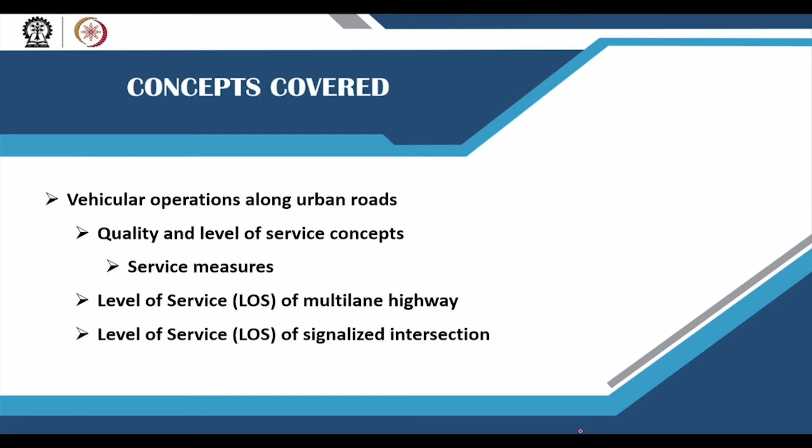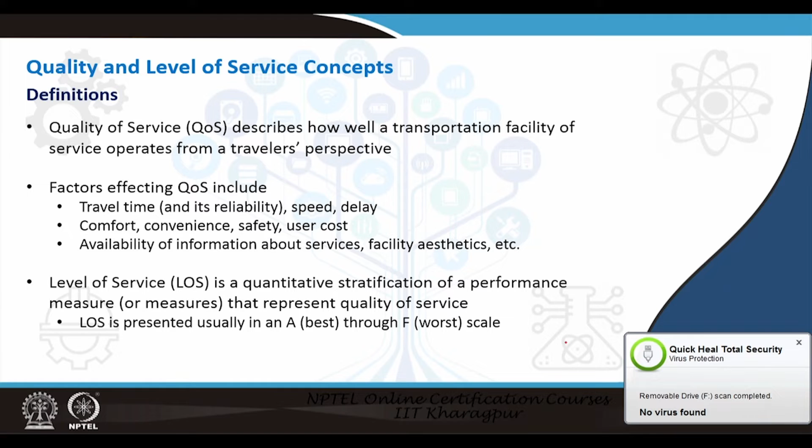When we talk about quality of service, this describes how a transportation facility operates from a traveler's perspective. We have often looked at transportation facilities from the point of view of the operators or service providers, but quality of service allows you to judge a facility or determine how good it is from a traveler's perspective. Factors that affect quality of service include travel time, speed, and delay for the people using the facility. Travel time may also be discussed in relation to its reliability. Comfort and convenience are also becoming more relevant when measuring quality of service.

Also important is the availability of information about services. In the digital era, we all want information beforehand about where a bus or train is, when the next bus is coming, or what the congestion level is at a street where we are going to drive next. All of these affect the quality of service being provided, whether by a bus system, a metro system, or even the highways in an urban area. So that is what is meant by quality of service.

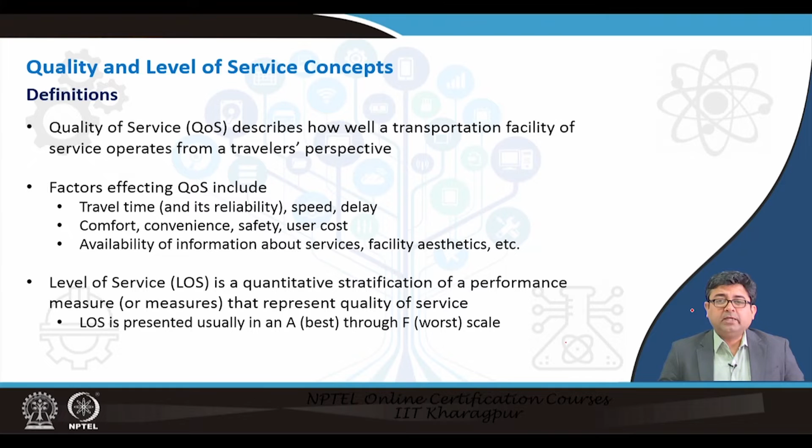Now, since quality of service is a qualitative measure, it is converted into a quantitative measure by something called level of service. What level of service does is stratify the various performance measures into different categories, each representing a quality of service. So level of service is the quantitative stratification of a performance measure or measures that represent quality of service.

So you can convert the qualitative measure into a quantitative measure, and the level of service is often represented or shown on an A through F scale, just like grades in a class or school, A being the best and F being the worst.

Often you will see, in case of highways, different levels of service for different facilities. They all depict that if the level of service is A, then from the point of view of users, that facility is providing the best service possible, whereas if it is F, it is providing the worst service possible. Although this is from the point of view of users, it also takes into account the operators' possibilities. The operators may require a huge amount of money to maintain the service expected by users, but that may not be feasible. So a middle ground is often reached to determine what is level of service A, B, C, D and so on.

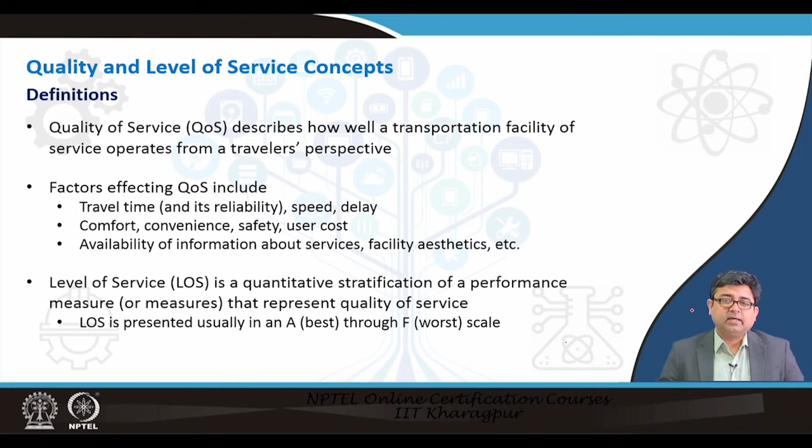So in all of this, in quality of service and level of service, essentially the measure being used is called the service measure. Service measures are performance measures used to define the level of service for transportation system elements.

So what should these service measures have? They should reflect the traveler's perception, but should also be useful to the operating agencies. This is how quality of service or level of service is associated not only with traveler's perception but also with operating agencies. It should be directly measurable in the field, otherwise it is very difficult to quantify if it is purely qualitative or subjective. So it has to be directly measurable in the field and should be estimable given a set of known parameters—if you know something, you should be able to estimate these service measures. We will explain all this in terms of a few examples in this lecture.

Service measure examples include: when we talk about the automobile mode of transportation, in the case of multi-lane highways, usually what we measure is density.

Now, density of a traffic stream should be directly measurable in the field. It can be measured by number of passenger cars per mile per lane. Since these terms were developed in the United States, they use miles, but we could use kilometers, that is not a problem. So, that is the directly measurable field quantity.

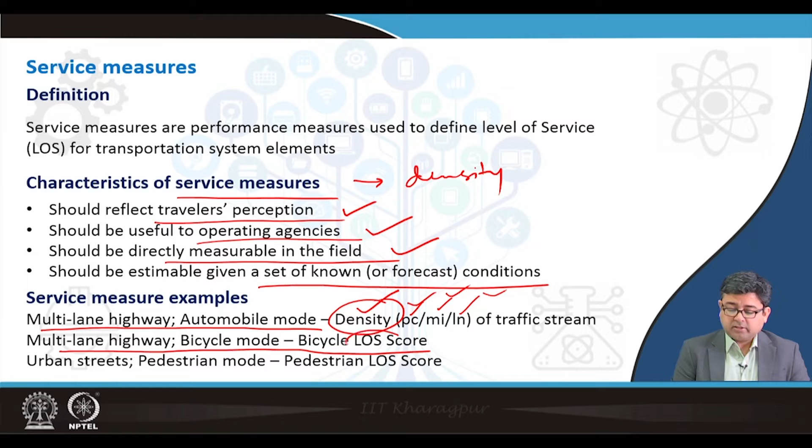Similarly, for the same multi-lane mode, bicycle level of service can be calculated using a bicycle level of service score, and for urban streets, pedestrian level of service can be estimated using a service measure called pedestrian level of service score. So this is how you make the connection between service measures, quality of service, and level of service.

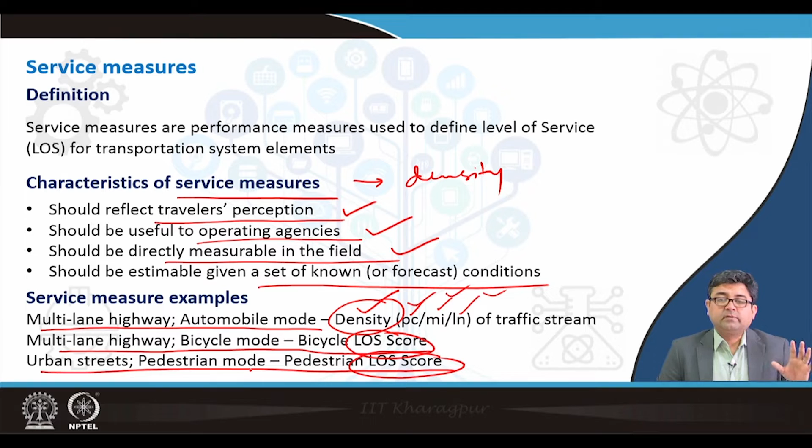Now, if you start looking at the level of service of various transportation facilities, they can be determined for highways, for intersections, and for other types of road users including transit, bicycle and pedestrians. Even within highways you can determine the level of service of an expressway or freeway, a multi-lane highway, a two-lane highway, and also an urban street. Similarly, for intersections you can look at signalized and unsignalized intersections, and so on.

In this lecture series, since we are concentrating on giving you an understanding of vehicular level of service, we will explain multi-lane highways and signalized intersections. Why did we choose these? Because our overall topic for this NPTEL course is urban transportation facilities, and in urban areas mostly you will find multi-lane roads and a lot of signalized intersections. So you should be able to gauge how well these are performing from a user's point of view, which is also useful to an operator.

In the other lectures that follow after the first set of lectures, we will look in detail at the transit, bicycle and pedestrian modes, which is the more focused topic of urban transportation systems in this course.

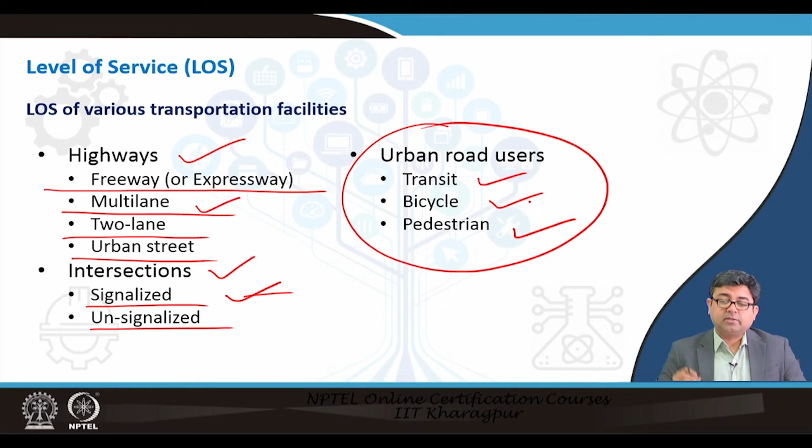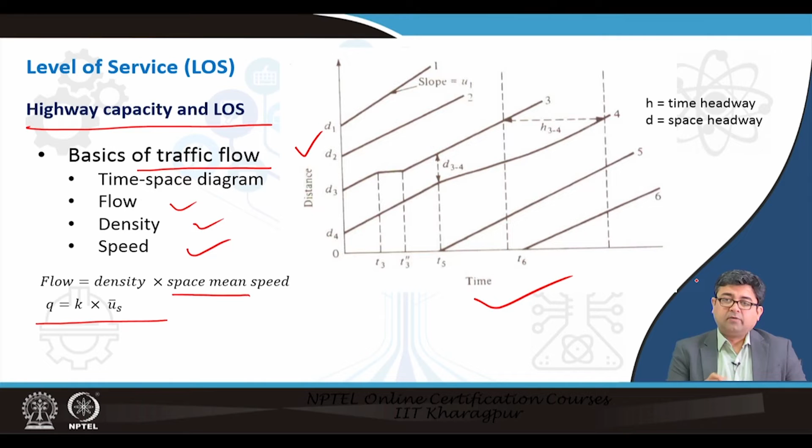If there are 6 different vehicles and these lines indicate their trajectories, at any point in time, time 0, vehicle 1 is at a distance d1 from that point, vehicle 2 is at distance d2, vehicle 3 at d3, vehicle 4 at d4, whereas vehicles 5 and 6 will arrive at that point at a later time. They have still not arrived at that point where t equals 0, they are still approaching it.

So, in this space-time diagram, the slope of each trajectory gives you the speed, and the slope and the distance between two trajectories can give you either what is called a time headway or a space headway.

So, the time headway is the time distance between two vehicles at any point. At whatever this distance point is, the two vehicles, vehicle 3 and vehicle 4, have a time gap, or time headway, of h3-4. So, time headway is nothing but the time when the front of the first vehicle crosses a point and the front of the next vehicle crosses the same point - that is called a time headway.

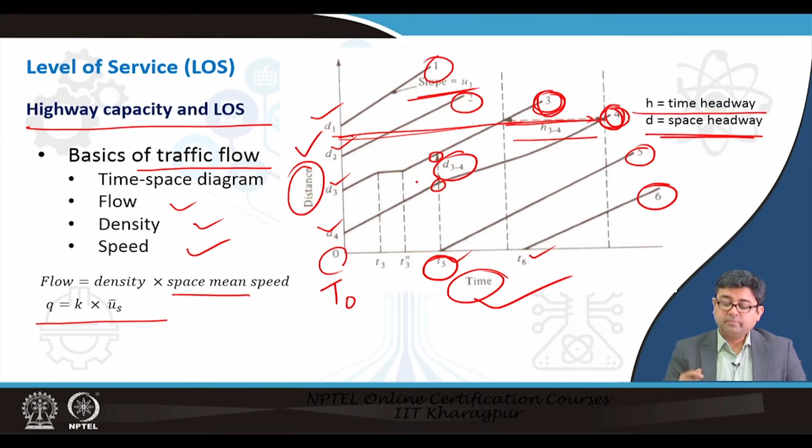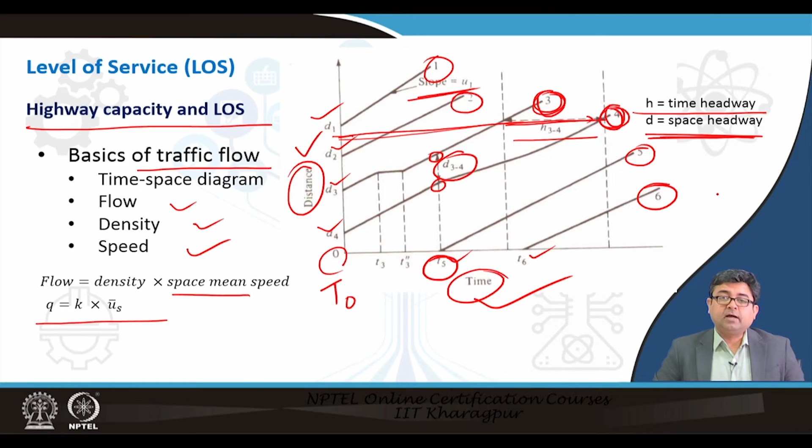Similarly, space headway for two different vehicles - the third and the fourth vehicle - would be, at any particular point in time, the distance between the two vehicles. So, the distance between two consecutive vehicles at any point in time is called the space headway. This is the basic understanding of traffic flow when you are trying to develop a level of service of highways. These are basic definitions of all this.

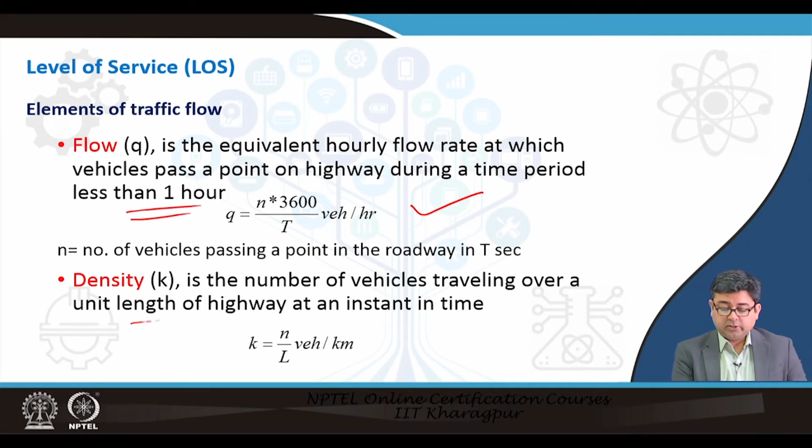Flow is the equivalent hourly flow rate at which vehicles pass a point on a highway during a time period that is less than 1 hour. It is given by this equation. Density, as is very common, is the number of vehicles travelling over unit length of a highway at any instant. It is given by this.

Similarly, space mean speed is the harmonic mean of speeds. When we are talking about speed, in traffic engineering or in development of level of service, we use space mean speed and not time mean speed, and it is given by this simple formula.

Capacity of a freeway or expressway is the maximum sustainable hourly flow rate in one direction based on peak 15-minute rate of flow, and it is expressed in terms of passenger cars per hour. So, it is the hourly flow rate - the number of vehicles passing a point per hour based on the 15-minute peak period.

This is another concept in level of service. We always look at the peak 15-minute period, because that is the worst traffic condition. We have to always design our facilities keeping in mind the worst condition. If we fulfill the worst condition, then any condition better than that will also be fulfilled. So, we are always looking at the worst condition and designing facilities for that.

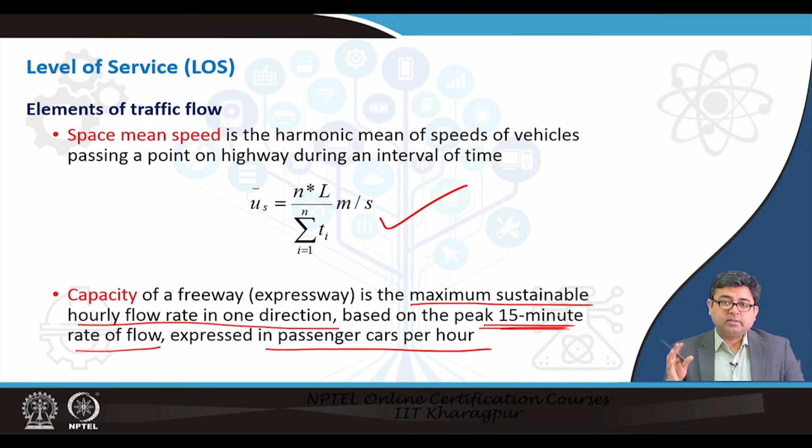Now let us quickly go through the steps that should be followed to calculate the level of service of multi-lane highways. In the first step, you need a set of inputs of the existing conditions, which include the volumes, the lanes, the lateral clearance, the access points per mile, percent of heavy vehicles, and driver population. All these are inputs to your highway level of service calculations.

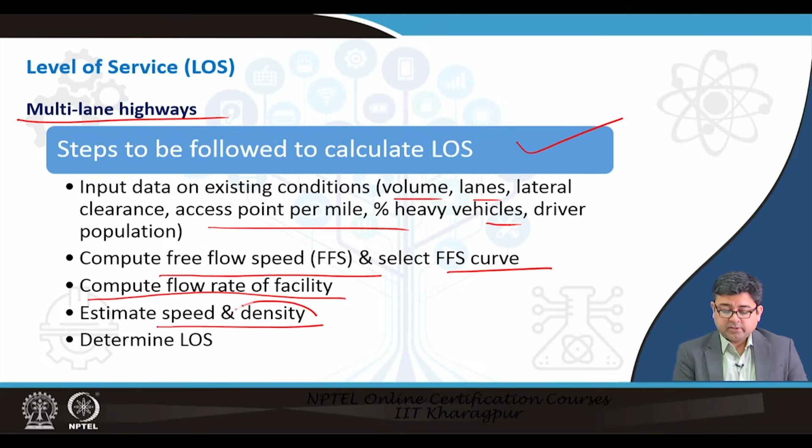After knowing these inputs, you calculate the free flow speed and select one of the free flow speed curves - there are multiple curves. After knowing the free flow speed, you calculate the flow rate of the facility, and then estimate the speed and density, from which you will get the level of service.

So, let us look at how you compute free flow speed. It is given by this empirical equation: the base free flow speed of a multi-lane segment, minus a bunch of adjustments.

The base free flow speed is always developed keeping in mind ideal conditions - the lane width should be 12 feet, there should be a certain amount of lateral side clearance, meaning enough space for vehicles to move within the lane. There should also be consideration of what type of median it is. It always depends - if there is no median, the speed is affected, so capacity and level of service will be affected. If there is a wide median, a grassy median, or even just a barrier between downstream and upstream flow, there will be variations in level of service. So, we have to adjust for all of this, and we have standard values given in the highway capacity manuals developed in the US, which India has also adopted and used as per our local conditions.

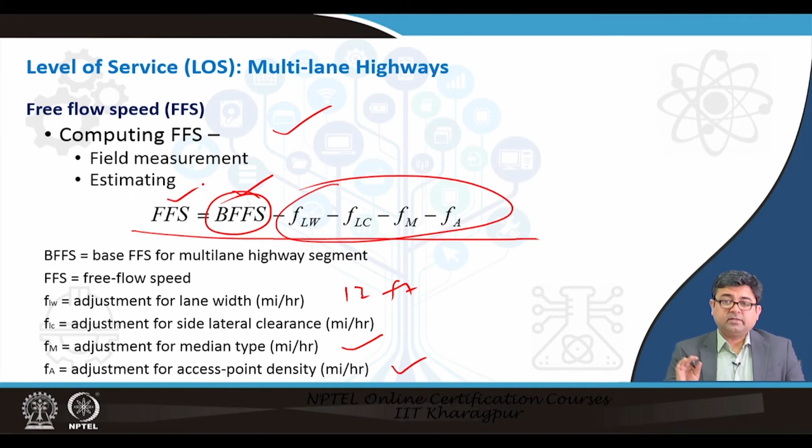These are the different types of adjustments you have to do to determine, or estimate, the free flow speed of your particular facility. Once you know the free flow speed, you have to determine the demand flow rate. You may already know the volume, since volume is one of the inputs, but you have to know the demand rate, and this has to be adjusted based on the peak hour factor.

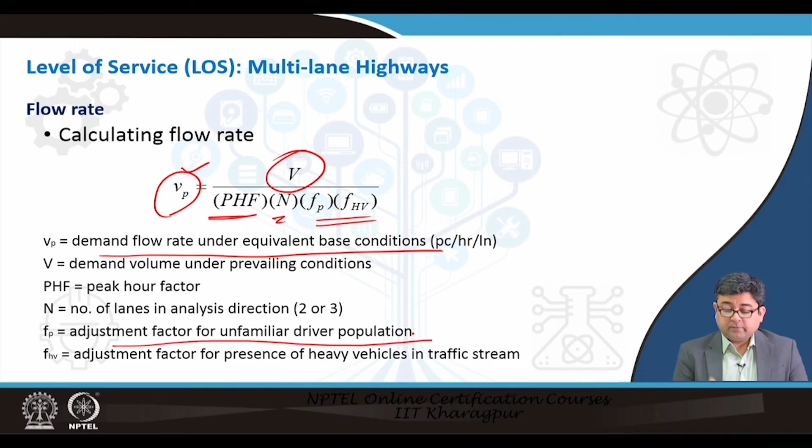So, depending on which hour you are calculating the flow rate, that determines the number of lanes, and then another set of adjustments, which is adjustment factor for unfamiliar driver population and adjustment factor for presence of heavy vehicles. If any traffic stream has a lot of people who do not understand or are new to the facility, then your level of service will differ, and also if a facility has a lot of heavy vehicles, your level of service will differ.

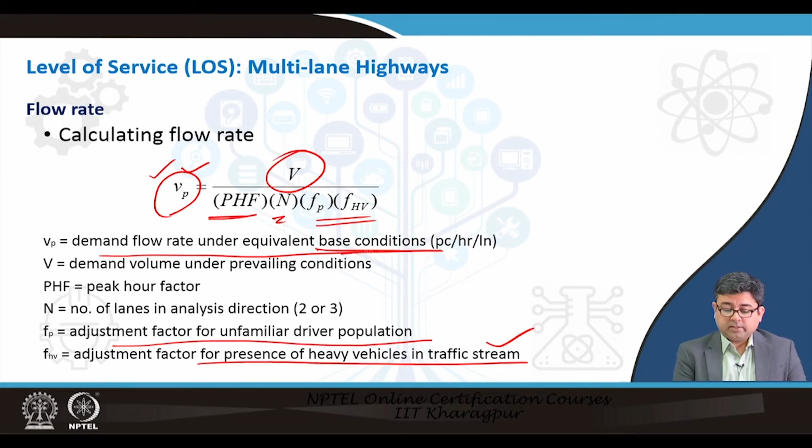That is the reason you have to calculate the demand flow rate equivalent to the base conditions. You already know the volume, that is an input. Once you know your flow rate and you have estimated your space mean speed, you can determine density using this simple formula, which is what I was referring to when I said that if you know certain parameters, you can estimate density.

Density is the service measure that is used to develop level of service for multi-lane highways - motorist evaluation of the quality of driving experience. Again, remember, it can be estimated in the field, it is useful for the operators, and also reflects the quality of driving experience from the point of view of the motorists. That is how you should choose a service measure to determine the level of service.

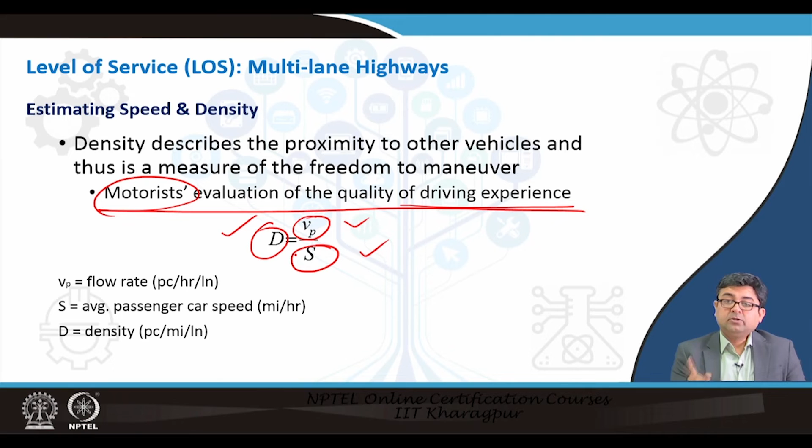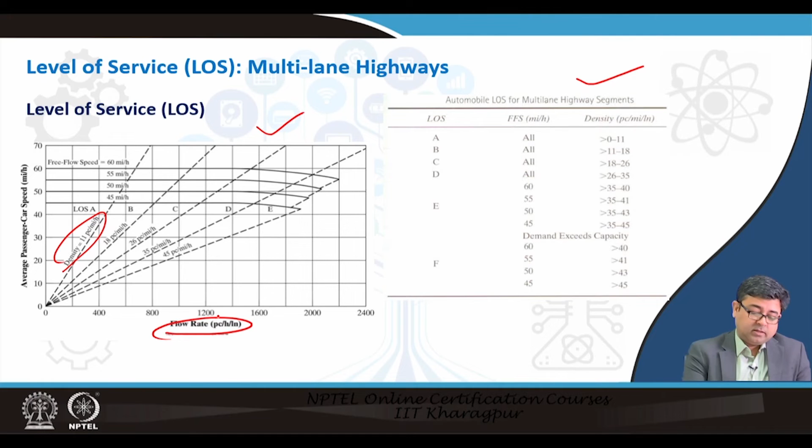Then there are standard curves and standard tables that are available to you depending upon the density, depending upon your flow rate, and depending upon your average passenger car speed. You can find out whether your multi-lane highway is operating at a level of service A, B, C, D, or beyond E is F. You can find this out using either the chart or the density values, and against the density values you can calculate the level of service given the different free flow speeds.

So, that is how in a nutshell you can determine the level of service of a multi-lane highway facility that is existing in your urban area.

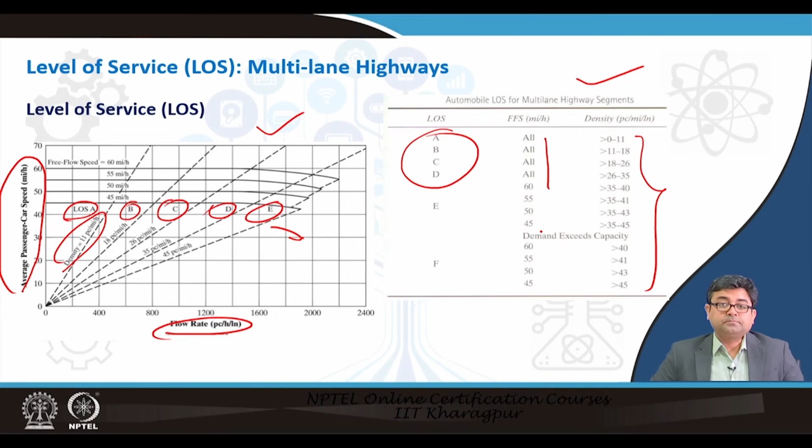Similarly, let us look at determining the level of service of signalized intersections in your urban area. Now, determining level of service of signalized intersections is a little bit more complex, because it involves a deep understanding of the traffic flow in your area, and especially in our case, in the Indian case, where the traffic flow is very heterogeneous.

You have to convert a lot of vehicles into equivalent PCUs, passenger car units. Non-motorized vehicles, two-wheelers, three-wheelers, all have to be converted into a standard equivalent PCU. So, it takes a lot of calculations, assumptions. However, there is a structured way of doing it. So, as long as you follow or understand the way, the later operational details you can always pick up.

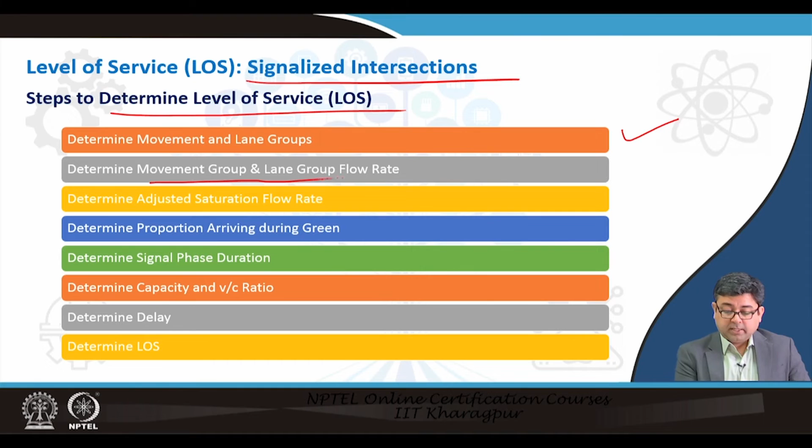So, first is to understand or determine the movement or lane groups. We will tell you what lane groups are, because that is a very important metric in determining the level of service of signalized intersections. Then you determine the movement group and lane group's flow rate. We already know what flow rates are.

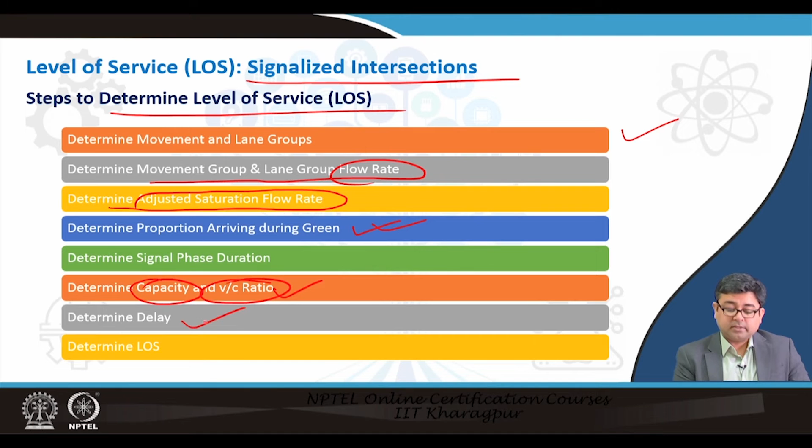After knowing the flow rate, you determine what is called an adjusted saturation flow rate. You determine how much proportion of the vehicles are arriving at that intersection when it is green - it is very important you do that. Determine what the signal phase duration is. Then understand what the capacity and the volume to capacity ratio is. Estimate delay, which is the service measure on which the level of service of signalized intersections depends. So, it depends on the volume to capacity ratio and delay, and that will give you the level of service.

So, quickly again, level of service is represented by control delay. Control meaning the control device, the device that is controlling that intersection, that is why it is called control delay. So you can always change the signal timing, that is under control. If it is an unsignalized intersection, for which also level of service can be determined, the delay at an unsignalized intersection is called uncontrolled delay, because there is no control there, you have no control over that intersection. So, in this case LOS is represented by control delay and V by C ratio, and LOS is computed for each lane group.

So, now what are lane groups? At an intersection you can go in all three directions, and if at each green all three directions are possible, then your lane group can group all those three movements into one, saying that is one lane group. However, if you have an exclusive left turn - since this example is from the US, in our case it will be an exclusive right turn - and then you have a through and a right, in our case through and left, you can have two lane groups.

One lane group is your exclusive left, in our case exclusive right, and the other lane group is through and right, in our case through and left.

So when you are developing a level of service, you are looking at each lane group, the delay vehicles incur within each lane group. Delay per vehicle incurred during the operation of a lane group.

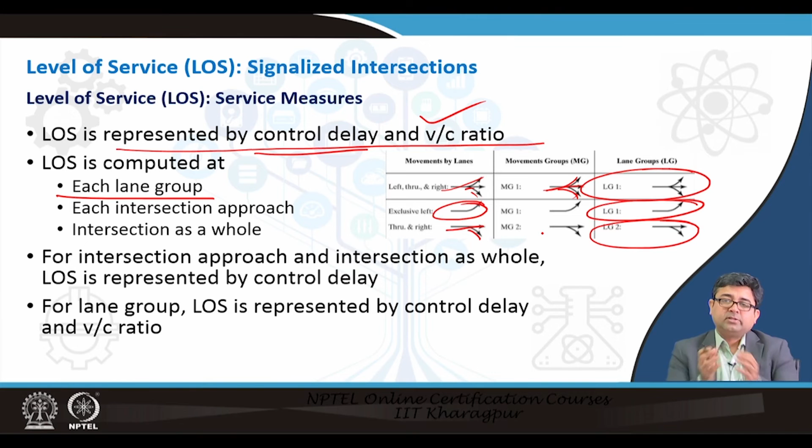You can then sum it up to get the approach delay. So at one approach there may be 3 lane groups. If you have individual lane group delays, you can sum them up to get approach delay, and then sum up all the approach delays to know the delay of the entire intersection. You can do it any of 3 ways, but the lowest unit is the lane group delay. So that is what it is: each lane group, each intersection approach, or intersection as a whole.

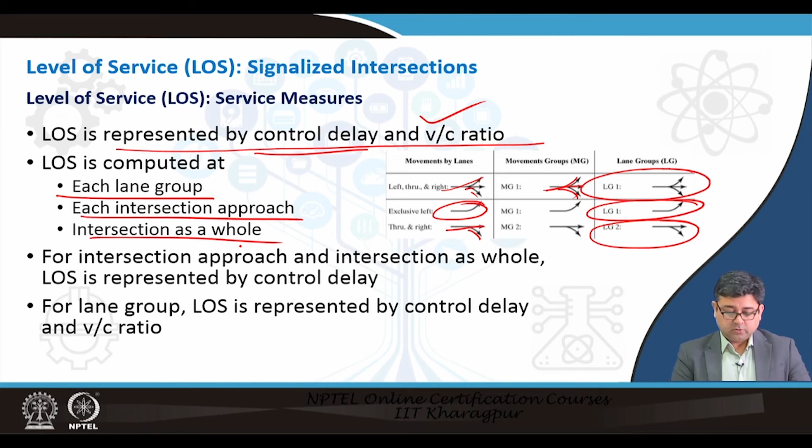Now, the capacity of a signalized intersection is the maximum rate of flow for a lane group. So we always concentrate on that lane group that can go through the intersection under prevailing traffic, roadway, and signal conditions.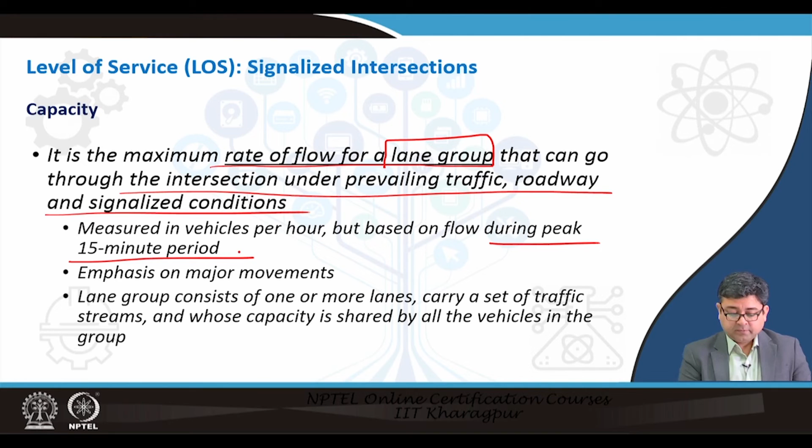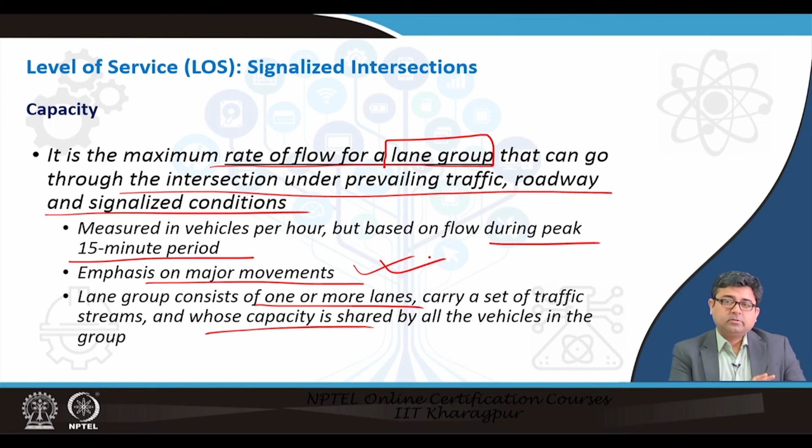This is measured during the peak 15-minute period, with emphasis on major movements, and lane groups consist of one or more lanes, as we already know. So usually, if a signalized intersection has one major road and one minor road, we emphasize the major road movements so that the majority of traffic is catered for, but we also keep the minor roads in mind.

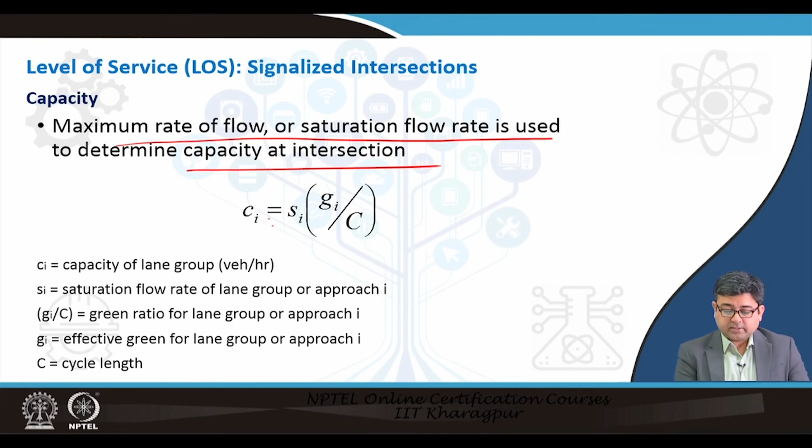Now, the capacity, or the maximum rate of flow, or the saturation flow rate, is used to determine the capacity at the intersection. The capacity at the intersection is given by a product of the saturation flow rate of each lane group multiplied by a ratio called the green ratio, the ratio of the effective green time and the cycle length.

We are not going into much detail about what each of these things are, but if you want to know, cycle length is the green time given to... so the start of the green in one leg...

So if you have 4 lane groups and it starts at time t1 here, the green starts at time t1, then it is green here, then green here, and then green here, and the time elapsed till again time t2 when this intersection has green. So the difference between these two times is the entire cycle length, and effective green time is essentially because vehicles do not get the entire green time to cross.

There is a yellow amber time and a red time. So if you subtract those times, and some lost times - that startup lost time and time to decelerate and stop - all those times, if you subtract from the green time, it is called the effective green time.

So the capacity of an intersection is given by this equation. And then you have to know the V by C ratio.

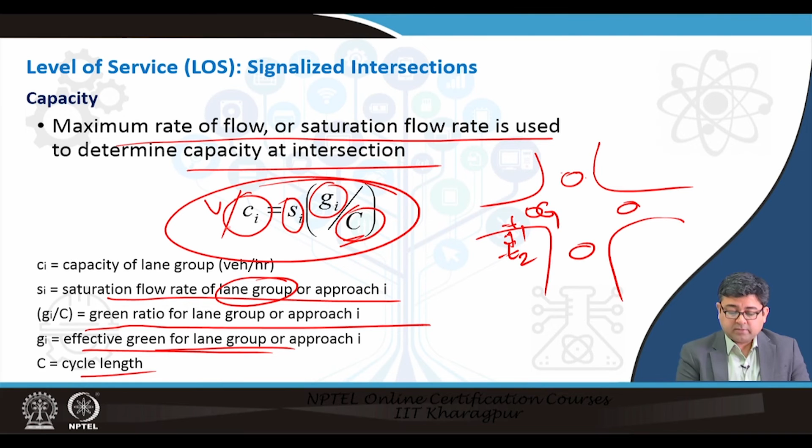So the V by C ratio, depicted by x for any lane group, is given by this equation, which is a direct derivation from the previous equation. If you just divide V by C, we already know the capacity equation for the capacity is this. So divide this to get the V by C ratio.

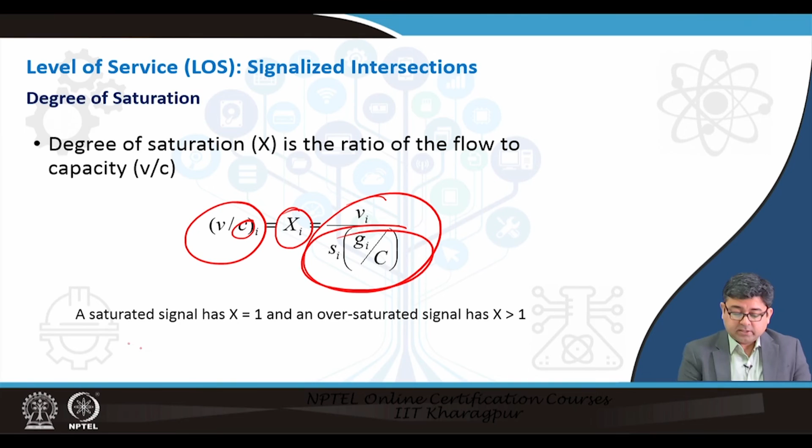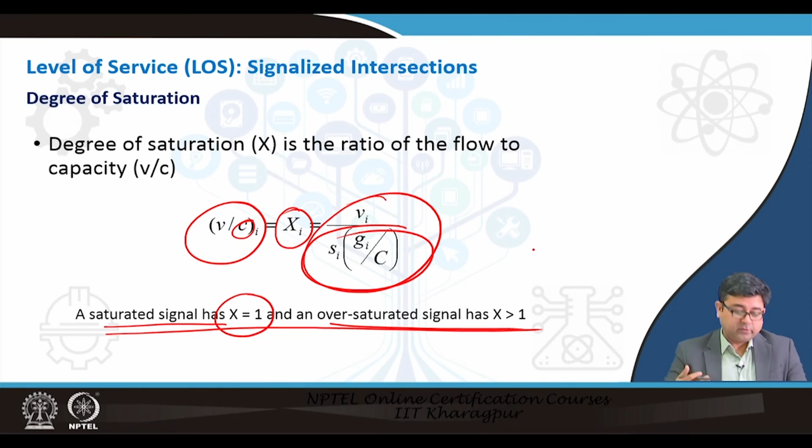So if a signal has x equal to 1, it is saturated, whereas an oversaturated signal has x greater than 1. Saturated meaning all the vehicles approaching the signal during the green time will cross the signal - that is either saturated or unsaturated - whereas oversaturated means not all vehicles approaching during the green time will be able to cross, and there will be some queue left over. That is called an oversaturated situation.

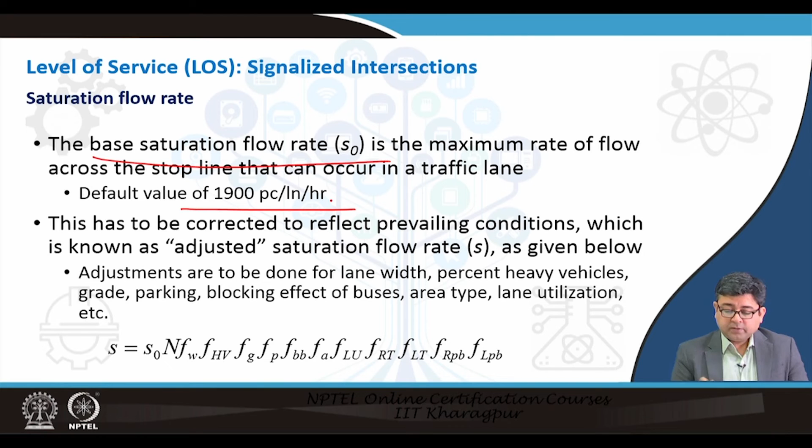Now, we always have a base saturation flow rate, which usually has default values of 1900 passenger cars per lane per hour, which is the maximum rate of flow across the stop line that can occur.

However, this ideal flow rate, or base saturation flow rate, is always ideal. It has to be adjusted, and for adjusting it you have to multiply it with a lot of adjustment factors, which include adjustment factors for lane width, percentage of heavy vehicles, area types - if it is a CBD versus a suburban area - and if there is a lot of parking around there.

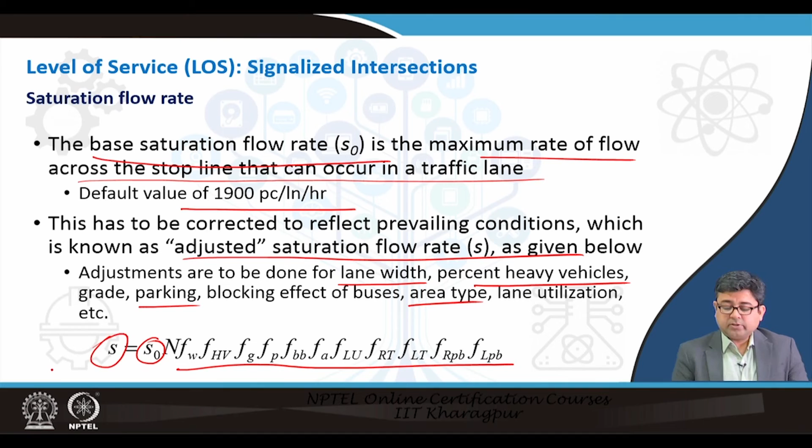So, all of these factors have to be adjusted for in order to know the adjusted saturation flow rate. Once you know the adjusted saturation flow rate, you determine what is called the critical lane group. So, if an approach has 3 lane groups, there would be 1 lane group that would have the maximum V by C ratio, and that would be called the critical lane group.

So, you have to always cater for the maximum or the worst condition. That lane group requires the maximum green in order to go through the signal. So, if you take care of that lane group, you would be able to cater to the other 2 lane groups automatically.

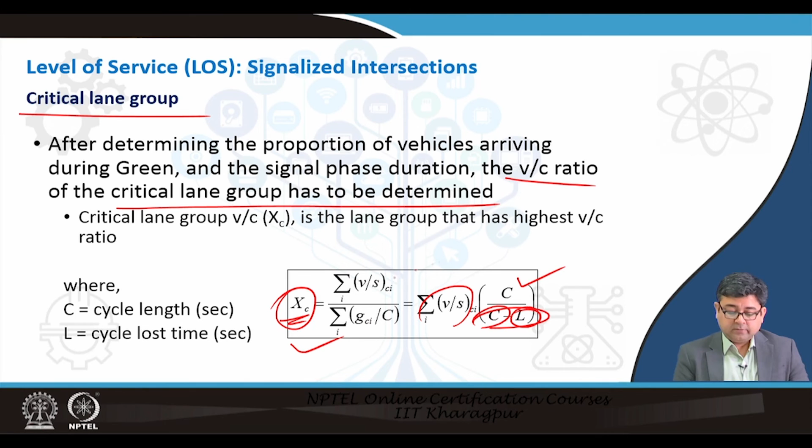We already know the equation for V by C ratio, with cycle length and effective green time. This is cycle length divided by effective green time, meaning cycle length minus all the lost times. Using this formula, you would be able to calculate the V by C ratio of the critical lane group.

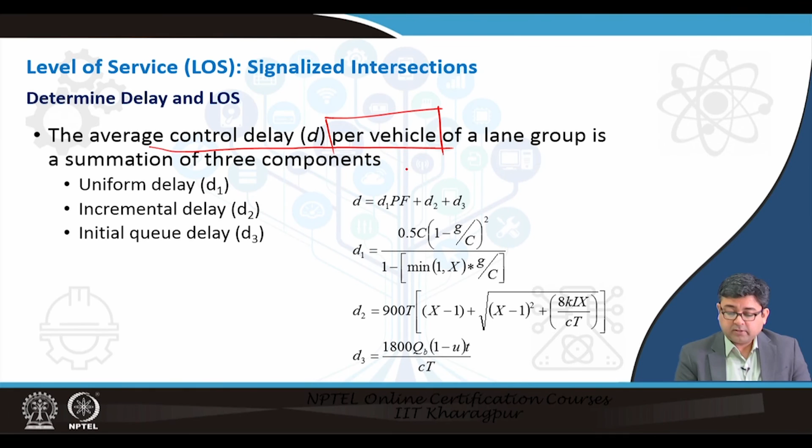Once you know the critical V by C lane group, you then calculate the control delay, or the average control delay per vehicle for that lane group. The average control delay is a summation of 3 different types of delays: uniform delay, incremental delay, and initial Q delay.

Uniform delay assumes that all of the vehicles arrive at a signal uniformly at a uniform rate, whereas incremental delay says that they do not arrive at a uniform rate, they arrive at a non-uniform rate, and what it says is that the demand may exceed capacity. Incremental delay takes into account that demand may exceed capacity, whereas uniform delay says that the saturation rate would never be arrived at, and there is always a uniform way of arrival.

Whereas initial Q delay says that, even if incremental delay is there — incremental delay says there may be oversaturation, or demand exceeding capacity, but there will be no queue left at the end of the green, so all vehicles arriving will move through the green time — initial Q delay says that there may be situations when there is a queue left over from the previous green time, because the green time was not sufficient to move all of those vehicles, so they were further delayed.

So, there may be 3 different types of delays, and the summation of those 3 delays gives you what is called the average control delay. These are all empirical formulas developed over years. I believe the incremental Q delay in the newer version of the HCM has a more detailed formula than this. This may be from the previous highway capacity manual, but these two formulas are empirically still valid.

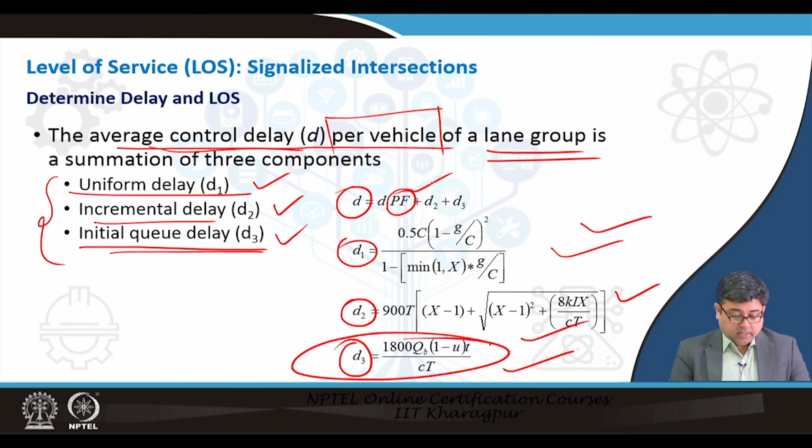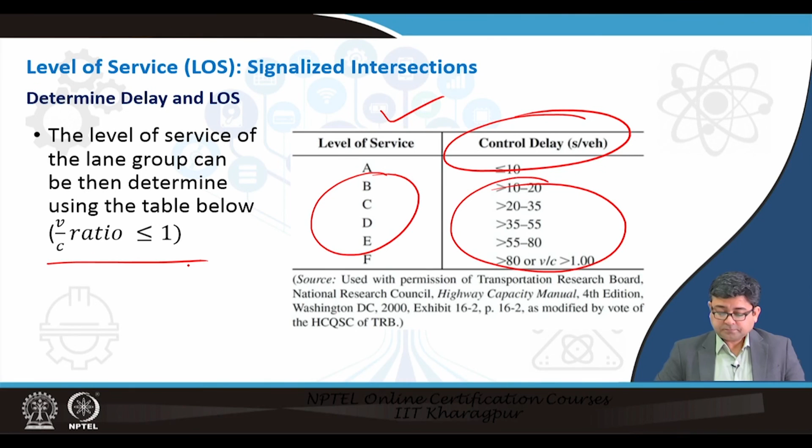Once you know the control delay, you can then determine the level of service depending upon what your delay numbers are. You will be able to determine whether they are A, B, C, D, or F. This table is for all conditions where V by C ratio is less than or equal to 1, so they are not oversaturated, they may be undersaturated or just at saturation. Anything oversaturated will always have a level of service F, that is 80 or greater V by C ratio.

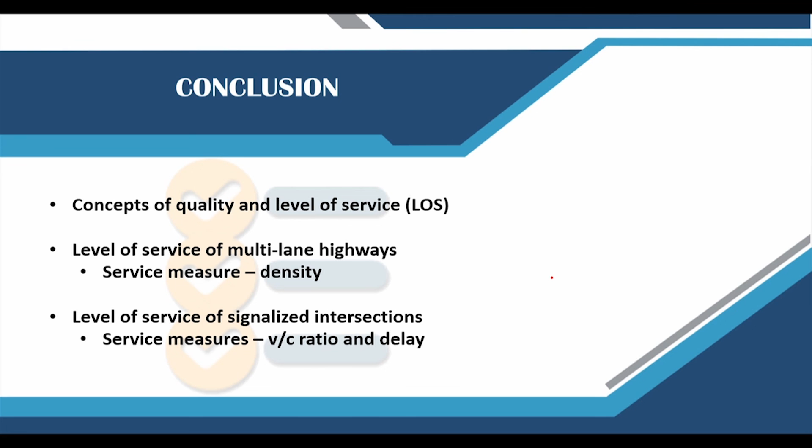So, in conclusion, what we have looked at in this lecture series is the concept of quality and level of service, and how quality and level of service are integrated with each other through these service measures, and how level of service is calculated for vehicles on a multi-lane highway as well as on a signalized intersection. There are different service measures for each. We looked at how density can be calculated for multi-lane highways, and we also looked at how V by C ratio and delay can be calculated at a signalized intersection. Thank you.